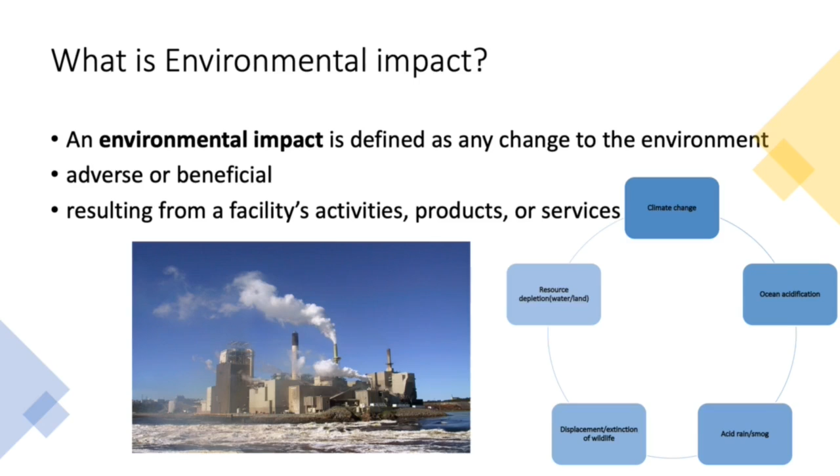Many examples of environmental impacts include climate change, ocean acidification, acid rain or smog, displacement and extinction of wildlife, and resource depletion like water and land use. Now, let us move on and see how these environmental impacts are assessed or measured.

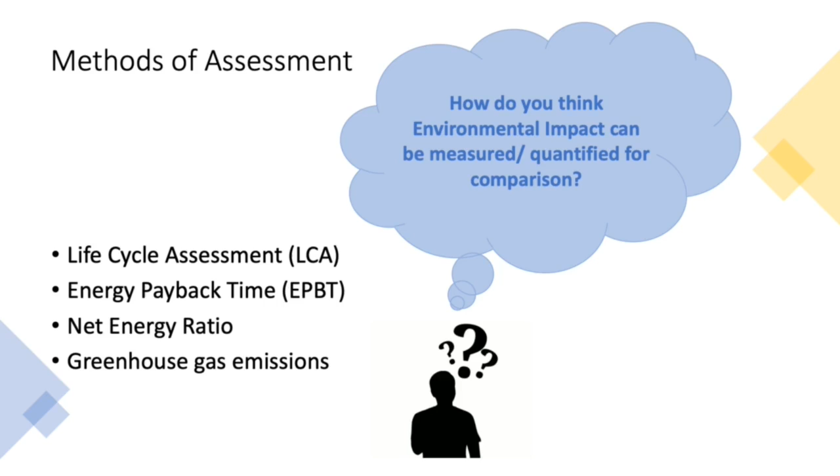Methods of assessment. We would think that environmental impact is such a subjective concept, but there are actually ways we can measure them. Let us see how. First is the life cycle assessment, short form LCA. Then, energy payback time, EPBT. Third, net energy ratio. And finally, fourth, the greenhouse gas emissions emitted by the energy source.

Life cycle assessment. It is known as the cradle to grave method. It is defined as a methodology for assessing environmental impacts associated with all the stages of the life cycle. It can be used for any commercial product, process, or service. And its main objective is to describe and evaluate the overall environmental impacts a certain action can have on the environment.

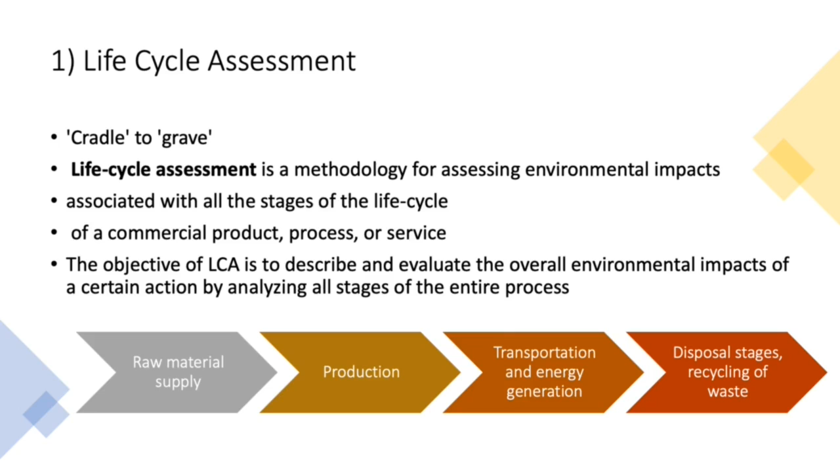We can see that it is used all the way from the raw material supply to the production to the transportation and energy generation and finally disposal of the waste materials and recycling. The LCA consists of four main steps. First is the goal and scope definition. Here we define what it is that we want to assess, and we also mention who has ordered such an assessment to take place.

Then, inventory analysis. This mainly is to compile an inventory of relevant energy and material inputs and the associated emissions to the environment. Then is the impact assessment, which is where we evaluate the potential environmental impacts associated with the identified inputs and emissions. And finally, after all of this, is to interpret the results that we have gotten and to make a more informed decision.

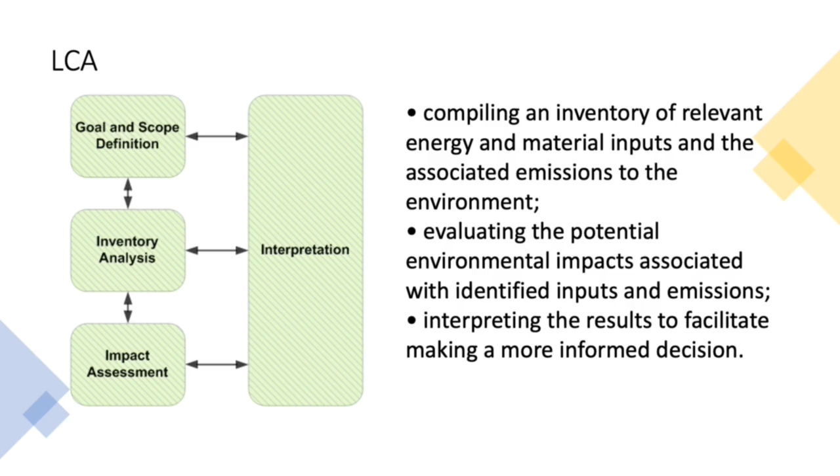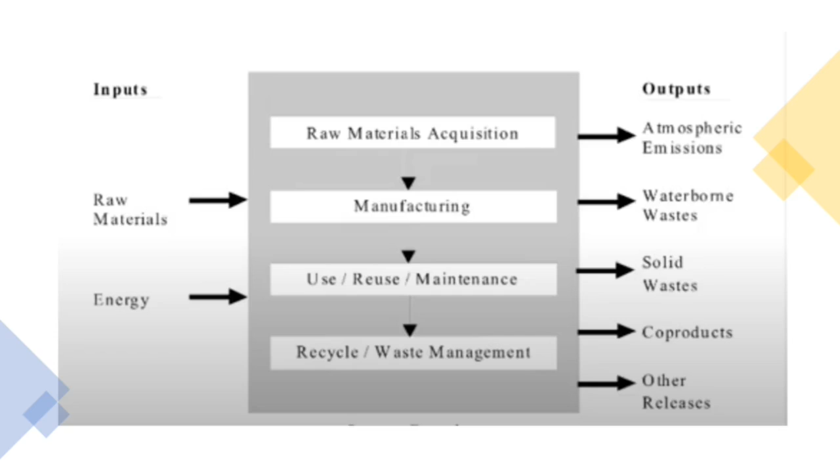Let us see why and why not LCA is a good method for measuring the environmental impacts. First thing is that it presents greenhouse gas emissions for renewable and nuclear energy systems on a scale that allows comparison between the different alternatives.

We would think that greenhouse gas emissions are negligible for nuclear energy systems, but since the LCA is for the whole life cycle, it measures the greenhouse gas emissions all the way from building the power plant to transportation of the materials, etc. So there is a considerable amount that needs to be considered. Hence, from that we can compare the different energy sources and make a more informed decision.

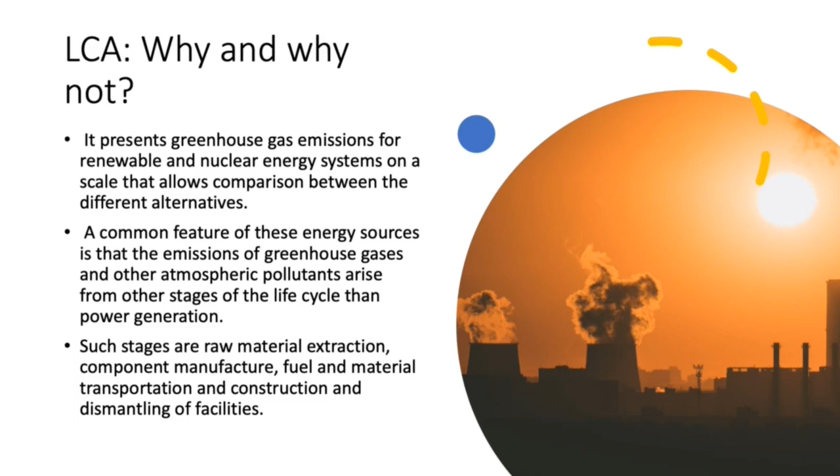But there are some reasons why this does have a disadvantage. First is that the long-term potential impacts caused by the increased greenhouse gases in the atmosphere are not really measured by this methodology, and it can be difficult to compare different energy sources due to their long-term impact.

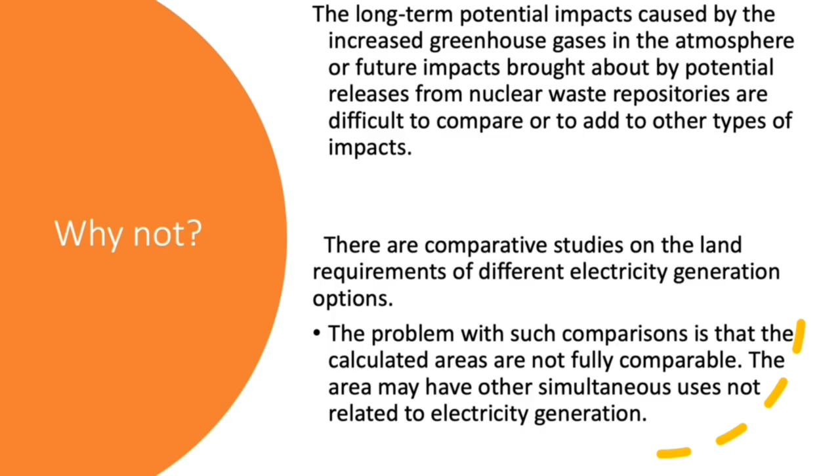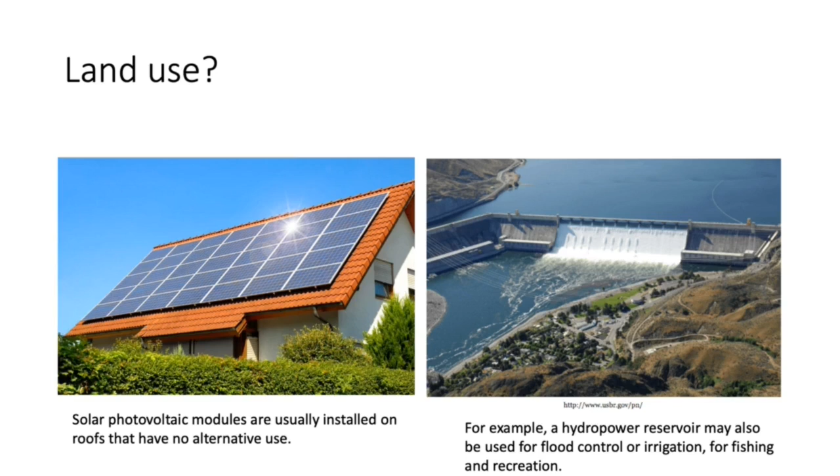But on the other hand, we see a hydropower reservoir. This takes up space which can be otherwise used for irrigation, fishing, or recreation. And in that case, LCA does not consider this alternative land use.

The second way is energy payback time. This is defined as the time required for the electricity generation equipment to produce the amount of energy equal to the energy used to build, maintain, and fuel this equipment, converted to the corresponding amount of electrical energy. This method is common for comparing different solar PVs.

Here we see a representation of the various solar PVs using their energy payback time in years on the y-axis and the materials used or the different types of solar PVs on the x-axis. We can see that the CdTe PV has the fastest energy payback time, which is less than a year.

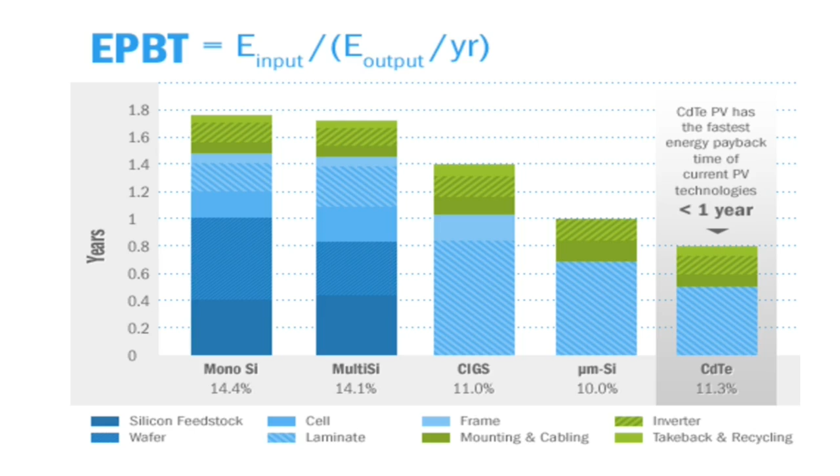The third way to assess the environmental impact is the net energy ratio. This is defined as the ratio of the net electrical energy produced over a plant's lifetime to the energy required to build, maintain, and fuel the plant over it. There, we have completed methods of assessment. Now, let us go on to see how the various renewable sources of energy affect the environment.

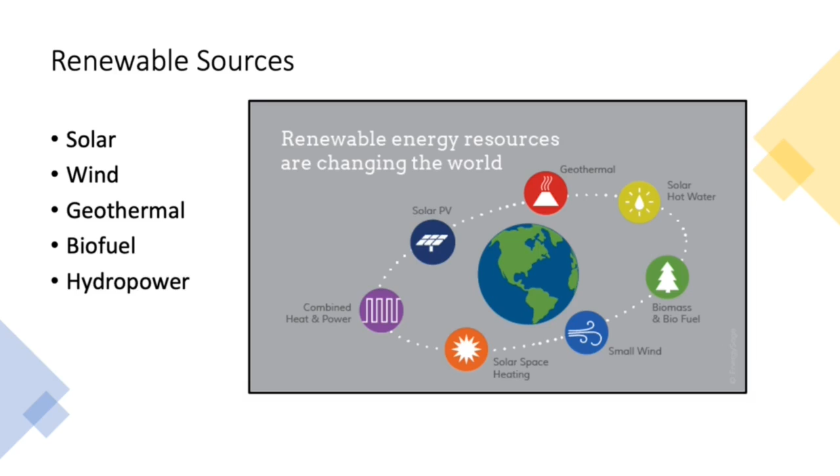Renewable sources. Some examples include solar, wind, geothermal, biofuel, and hydropower. First and foremost is solar energy. Think to yourself, what can be the possible environmental impacts due to solar energy? We have heard that it is renewable, and we have an intuition that there is not much greenhouse gas emissions due to it. Let us see how.

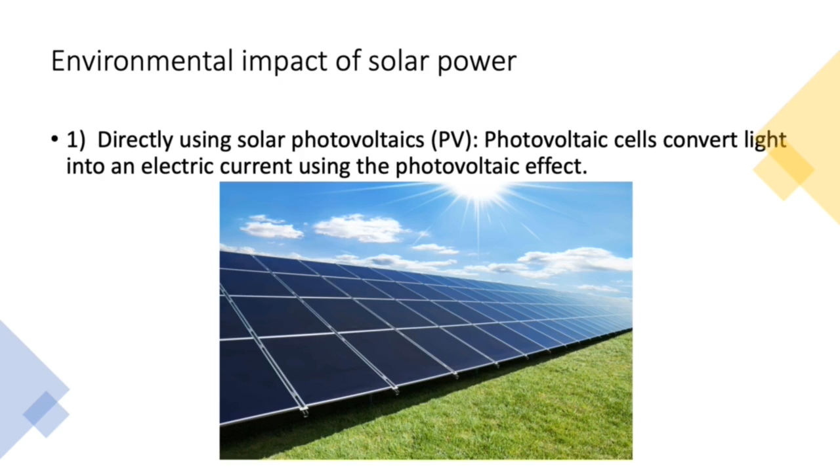Solar power involves two types. First is directly using solar photovoltaics, otherwise known as solar PV. These photovoltaic cells convert light into electric current using the photovoltaic effect. For PV solar energy, the water use is not much, and the life cycle water consumption for such utility scale operations is about 45 liters per megawatt hour for a flat panel PV solar. Only wind power, which consumes essentially no water during operations, has a lower water consumption intensity. However, there is some water needed for cleaning the PV panels.

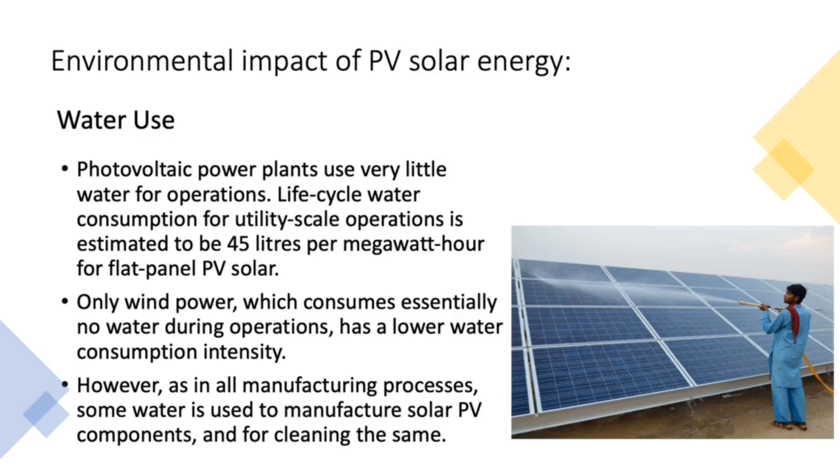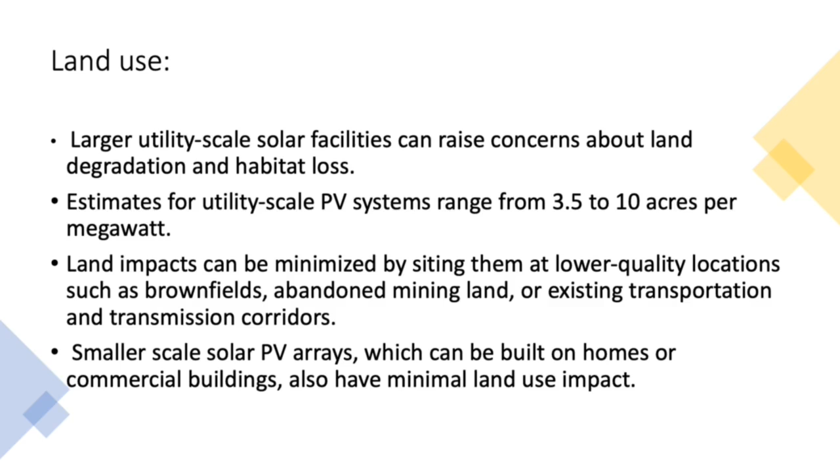Then we come to the land use, which depends on the scale of the facility. Large-scale solar panels can raise concerns about land use, which causes degradation and habitat loss. It ranges approximately from 3.5 to 10 acres per megawatt. However, such impacts can be minimized by locating these panels on abandoned mining lands, brownfields, or existing transportation corridors. Smaller scale PV arrays, which can be built on homes or on the roofs of buildings, also have minimal land use impact.

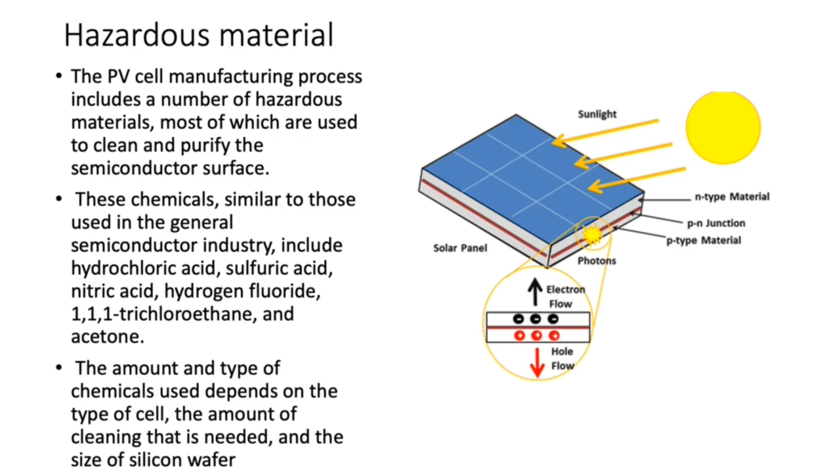A major area of concern is the hazardous material used to construct these PV cells. The manufacturing process itself includes a number of hazardous materials which are used to clean and purify the semiconductor surface. These chemicals are similar to the ones used in the semiconductor industry, including HCl, sulfuric acid, nitric acid, HF, and 1,1,1-trichloroethane. The amount and type of these chemicals used depends on the type of cell, the amount of cleaning that is needed, and the size of the silicon wafer.

There are three types of solar cell materials: thin film, monocrystalline, and polycrystalline. The thin film PV cells contain a number of toxic materials like gallium arsenide, copper indium gallium diselenide, etc., which are toxic and hazardous to the environment. The recycling is expensive, so disposing of it is common.

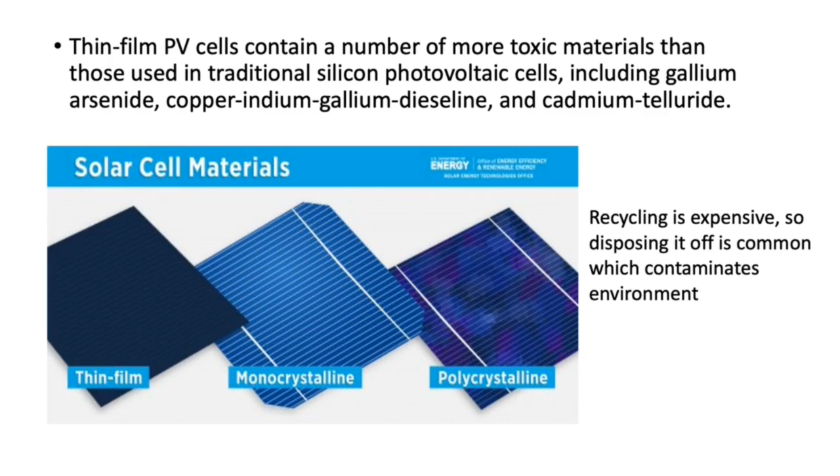Along with the normal PV cell impacts, there are also some additional impacts. First is that it requires a much larger area and hence more land use, which is between 4 and 16.5 acres per megawatt. Second is that CSP systems, like all thermal electrical plants, require water for cooling. Water use depends on the plant design, plant location, and the type of cooling system. There is a dry cooling technology which does not require as much water. However, the trade-offs to these water savings are higher costs and lower efficiencies, hence it is not used as frequently.

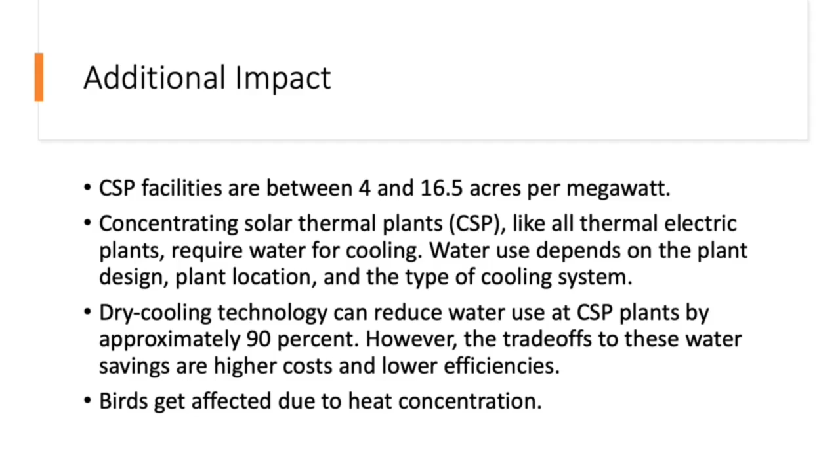Coming to the greenhouse gas emissions, the life cycle greenhouse gas emissions for solar power systems are in the range of 22 to 46 grams per kilowatt hour of energy. This differs for solar PV and solar thermal systems. But to compare, a gas-fired power plant emits around 400 to 600 grams per kilowatt hour of greenhouse gas emissions, which is much, much more. The total life cycle emissions primarily lie in the construction and transportation phase of the materials.

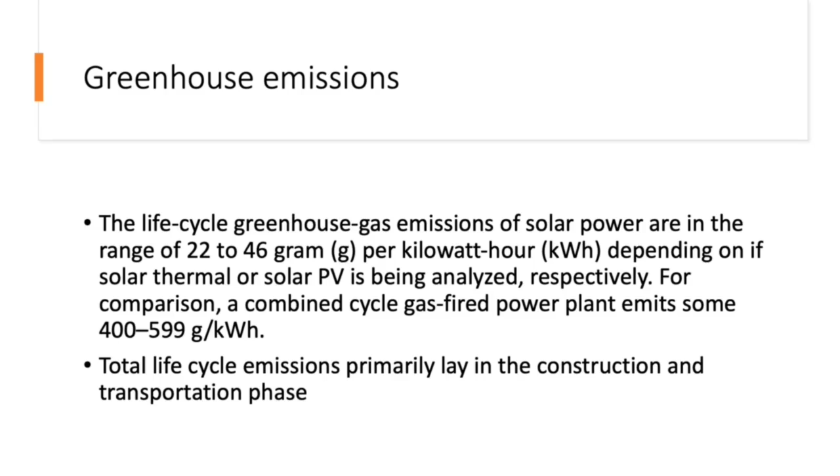A fun fact is BP Solar owns two factories in which the energy used to manufacture solar panels is produced by solar panels, hence giving a net carbon emission equal to zero, which is the goal of many companies in the future.